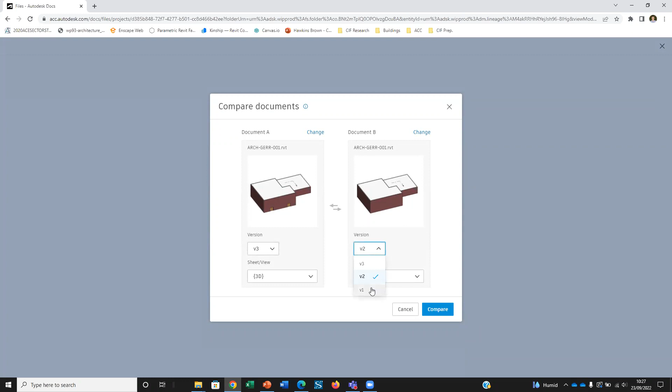So what I can actually do with those versions is click on any version and go, okay, I want to check this version before I share it with the shared area. I want to compare what's changed between the last two versions. I'll open up version 2 and version 3. I can go back to any version that I want to as well. And this is all done within the web browser. This is a Revit file, but it can be done on an IFC file and a CAD file. And it showed me what has changed in that model.

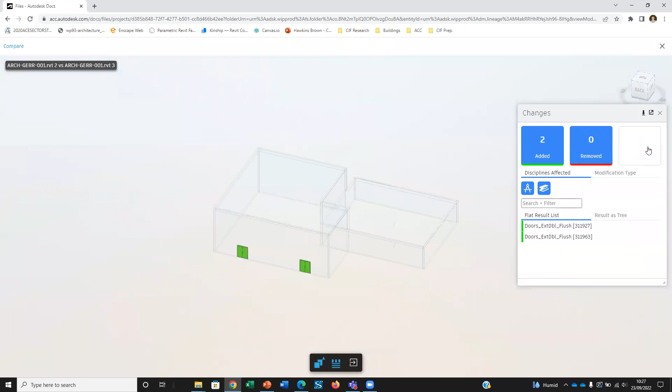This works with quite complex models as well; I just happen to have quite a simple model here. I can see what's modified with that wall. I can click on that wall and go, okay, what's actually changed about this? Oh, the doors have been added. And I can filter on any items that have been added as part of that Revit file. So it automatically does that.

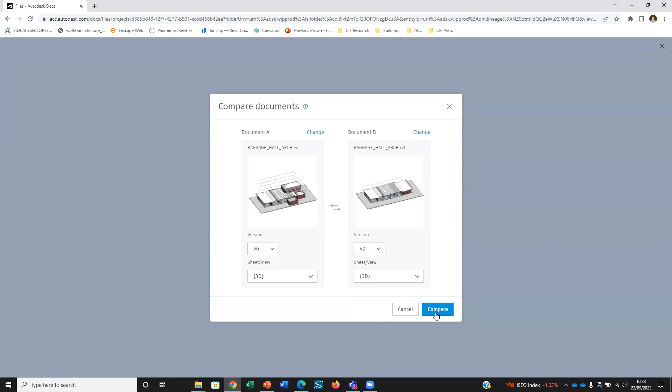As soon as you upload a file with the exact same file name, it bases it on the file name. And I've got lots of other files in here that I'm able to perform similar tasks on as well. I've got another file here. I can go right back to previous versions and go, okay, I want to compare version 6 to version 2. And maybe you perform this in your own work in progress area before you share out your file.

And I can see then there's been a lot of changes from version 2 to version 6. I can see lots of stuff has changed, and I can filter on any of those items that have changed as well. So it does that automatically for you within any of the folder structures that you place the file into as well.

And what I'll also show you as part of this is, as part of the CAD file, I can do the exact same thing. So I'm just looking for a relevant CAD file that I have. That one. So it does similar for a CAD file, but it just overlays it. I think the 3D view is a lot more effective. So let me see this particular one here. So I'm going to compare these two versions.

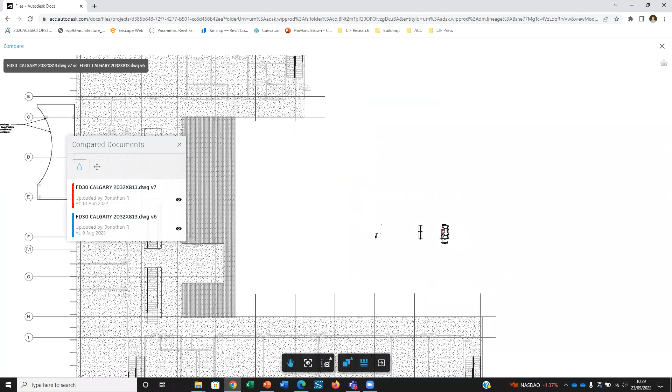I've got two drawings here. So this is version 6 and version 7. I'm not sure if anything has changed necessarily. So all that's changed is actually this door detail. You can ignore the roof plan there. So the door detail has changed on this. The door handle has increased, and I can see from version 6 to version 7 what the change has been, and I can filter those as well, whichever way I prefer to.

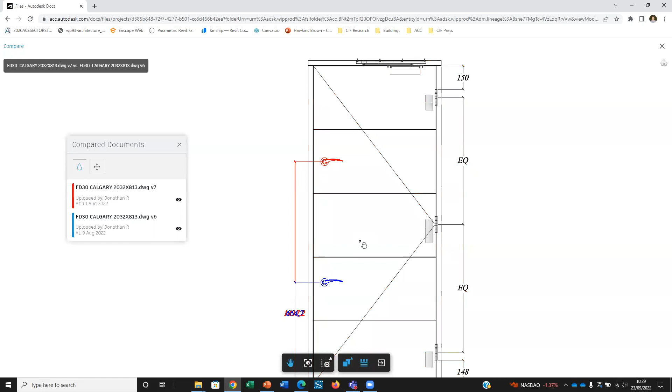So it automatically does that for CAD files, DWGs, and it does it for vector-based PDF files as well. It will show me that comparison as well. So you're able to check your files before you effectively share them out with the rest of the design team. So let's take that ISO requirement to check and review a file that you need to share out. So let's say we want to share out a particular file. Let's say it is a PDF as an example.

So I'm going to take this particular PDF and go, okay, well, we're happy to share this file now. I want to submit that for a review. So what's going to happen here is it's going to go through something called a review process. And if the file is approved on review, it will then be copied into a destination folder within the shared area. That file does not exist there already, which is that LTU file for the work in progress.

So I'm going to take an architectural work in progress file and transfer it to the shared area. So if you keep in mind, our reason for doing that is potentially so other design teams have access to the shared area, but they don't have access to our work in progress area. Let's say the structural engineer will eventually be able to access the file once I put it through a review process. I'm going to do that now.

Once I choose a particular file, as the architect or architectural team, I'm going to choose a particular relevant file here. This one, I'm going to go, okay, I want to submit that for a review. I'm going to put it through something called an approval workflow. So I built these templates in the background. This particular one is architectural WIP, architectural shared. I'm going to give it a name, RV021 as a review title.

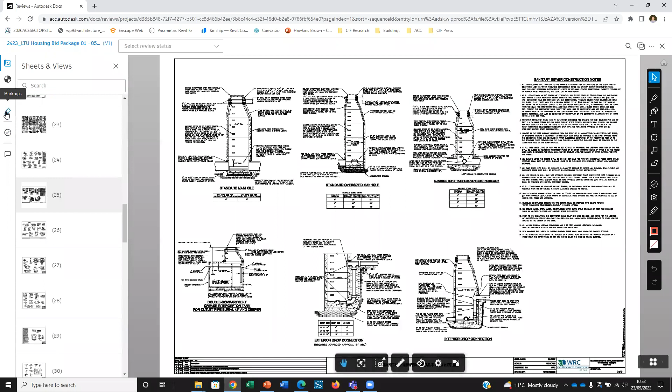I can create markups on top of this if I need to as well. Even things like revision clouds, various different pen tools as well. So you can get quite detailed in terms of what you want to mark up. With those markups, I can also assign them back to somebody if I want to as well.

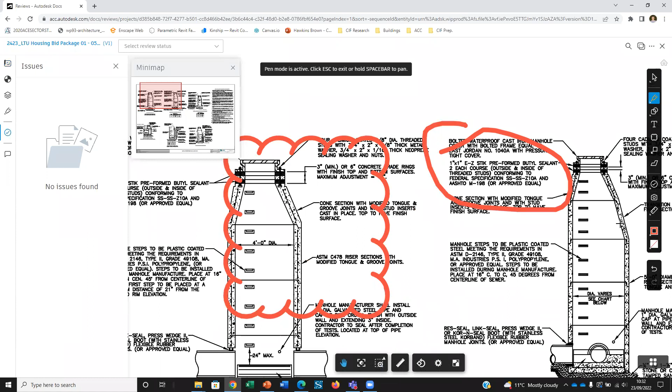I can go, okay, well, this detail needs to be checked. I'm not happy to approve this document. I go, maybe there's a requirement change here. I can create something called an issue, place a push pin, and I can assign that back to the relevant person. So maybe it's assigned back to this Jonathan R guy, or I can choose the role of the person, or I can choose the company it gets assigned back to.

If I want to, I could attach the client spec if I needed to. I could go into my files area, back into my folder structure, and wherever that file may reside, I could attach that if I wanted to. And therefore, this Jonathan R guy will have that information and they receive that issue. So, okay, well, I want to submit that. So Jonathan R immediately will receive a notification with that.

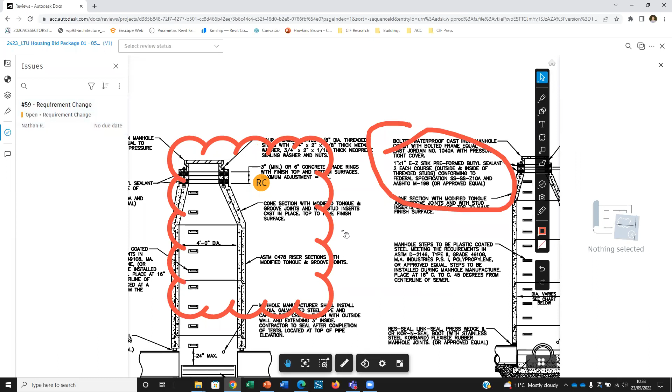They'll have received an email notification to say that an issue has been assigned against them, and they'll see this comment in here. So what they now know is that there is an issue, and they can come in here and they can view the markups and they can see any of the requirements that they need to update the drawing. So I'll just come out of that for a moment. Let's say I'm not happy to approve that. I could obviously reject it if I wanted to, but let's say you've now received the updated drawing from someone. It's gone through the approval process again.

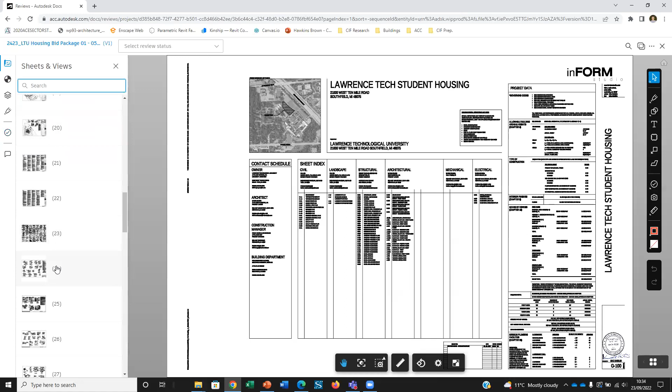You can open up the drawing and you can go, okay, well, I need to look at what issues are on this particular drawing or on this particular sheet. I can go back to that particular drawing number, that particular detail or that drawing sheet if I need to. I can navigate to that relevant sheet and I can close that particular issue if I want, or I can also come into the issues tab and I can review that same issue as well. I can go, okay, well, that detail has been increased.

Filter on that. So there's the requirement change. That's the same one I generated. There's the file attached, so I can see that file. I can go, okay, well, I'm happy that that's addressed. I can close that issue now. It's been addressed, and I'm happy to approve this document. Submit review. Okay, I'm going to approve it.

And what's going to happen now, once it's been approved, it's going to be copied into this final location. So you can see it started here in the work in progress area. It's now been copied into the shared area. So that file is now available for the rest of the design team to access. And it's gone through that check, review, approval process. So that's effectively how you move documents through those various stages.

And it's a similar process if you're going from shared into published as well. It's a very similar process. Obviously, you'll be checking for different types of information as well. So now if I go to the shared architectural folder, for example, I can see that that file now exists in there. It wasn't there previously. And I can open up that file, and now all of the rest of the design team has access to that particular file as well. So copy that file across.

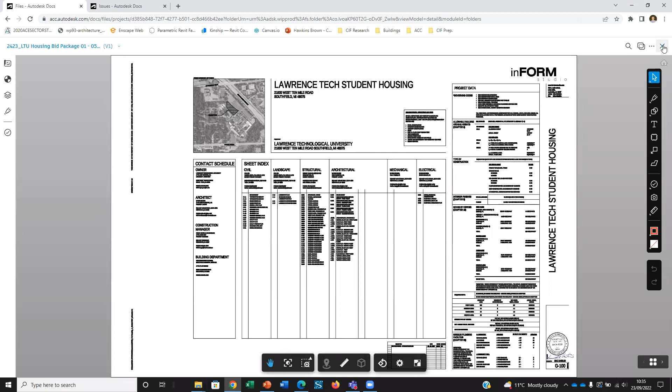So a couple of things that I didn't do there was I didn't enforce a naming standard, which is extremely important on ISO 19650 projects. And Autodesk Docs does allow that management effectively of the naming standard. So for the naming standard, what I probably should have set up on my project in the first place was a naming enforcement standard. A naming enforcement standard allows you to work to the ISO 19650 document.

So what that means is that I can set up the naming standard. So it can be the project code, originator code, zone, level, type, role, drawing number. And I can apply that to a folder or to a folder structure. I can also apply revision code and status code as well. That's something called related attributes. So what that allows me to do is if someone uploads a file and it doesn't comply with this naming standard, it will put the file into a holding area.

So it kind of maintains that naming standard. So let's say I go back to my files area here. And if I go, for example, into my shared area, I have another folder set up here for interior architects. So what you'll notice on this is I've actually enforced a naming standard. So if I go to this folder and go to more, it says unenforced naming standard.

So what I should have really done at the start was I probably should have gone to the entire folder structure and enforced the naming standard on the entire shared area at least, so that any file that's coming into the shared area has this rigor applied to it, that the naming is being checked before it's being put through a process.

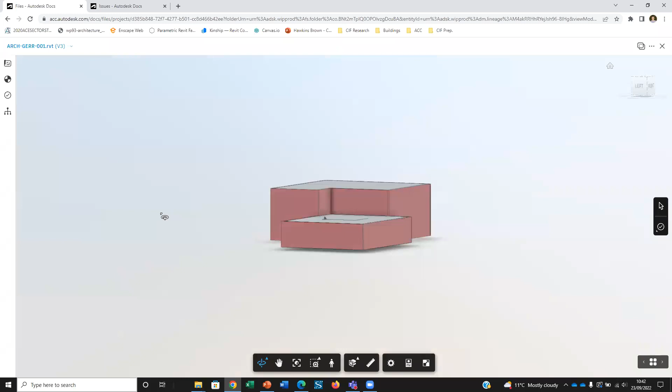I can say, okay, the building's looking pretty basic, we need to add some more detail, or whatever the case is. I want to raise an issue here - okay, there's a requirement change, minor issue. I can create custom issues here if I want to. I'll say, some client feedback, for example, and put an issue on that.

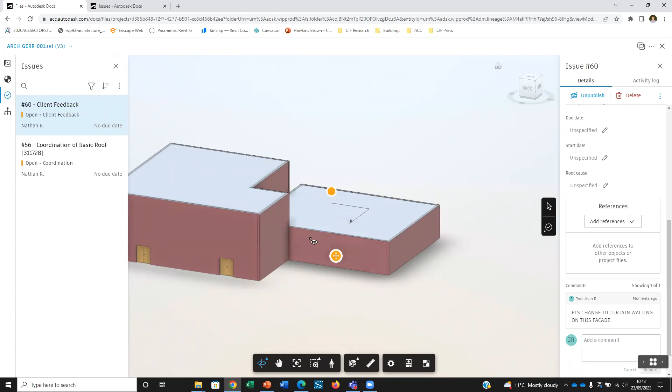I'm going to assign it back to any responsible individual - in this case, Nathan R. - and I can give that person the instruction: please change to curtain walling. So then Nathan R. will get that email, and he knows in Revit or whatever piece of software he's working in that they need to update that wall to the curtain wall.

With issues, you can track them in the platform. Nathan R. will only see the issues he's actually been involved with - he won't see all of the other issues. If I go in here, Nathan R. will see that issue, see the model it's been placed on, and can actually click on the model, which brings him now into the model.

You can go, okay, what's the issue here? You can open up that model in the common data environment and see that pushpin, see the comments if you need to, and even put in comments yourself. Or he can open up Revit or whatever software he's working in, make that change, and then re-upload his file into the common data environment.

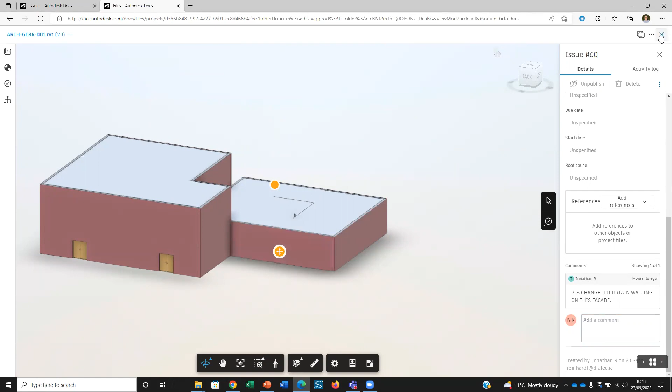So I'm conscious of time there - happy to take any questions now. There's certain elements I haven't gone into; I focused on the folder structure, the permission management, the review process, and then just uploading files and using the naming convention as well. So happy to take any questions. Hopefully that was useful, thank you.